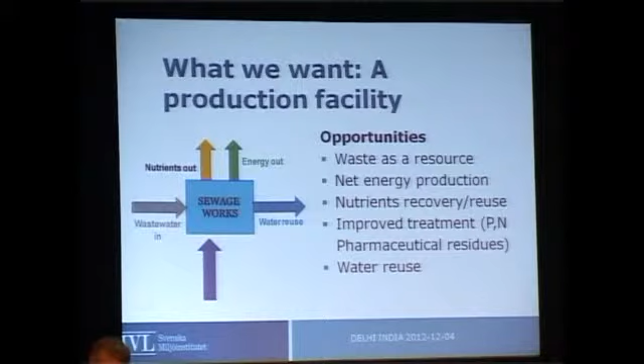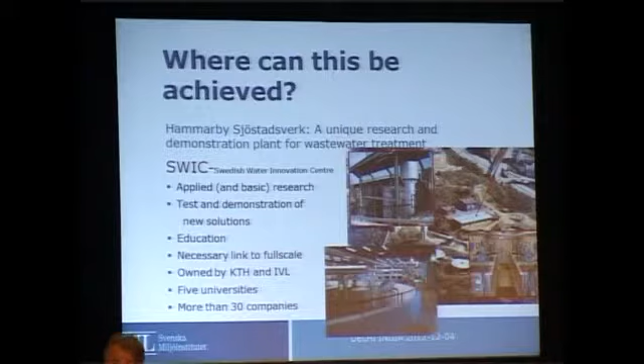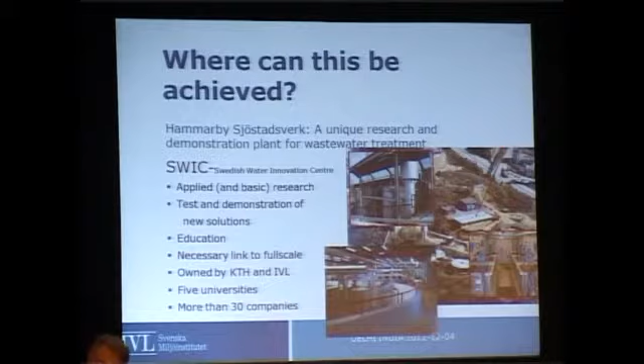We are working together in a pilot plant where we have basic research and applied research, and we include small and medium-sized companies and one big company, Xylem Solution. Together, we try to develop this solution by doing realistic research at such a scale that it can be upscaled to full scale.

We are talking also about pharmaceutical residues. The richer we are, the more medicine we consume. There is a strong link between that. Don't ask me why, but it also comes out. The residues from this medicine come out.

We have been measuring now for 5 years. It comes out from everyone because the doctors are not able to give you the correct dosage, so something will come out. You will find it in the treatment plants, out in the lakes and rivers. We can follow the concentration going up. Is this problematic? No one really knows. It might depend on if you let out more Viagra or something else.

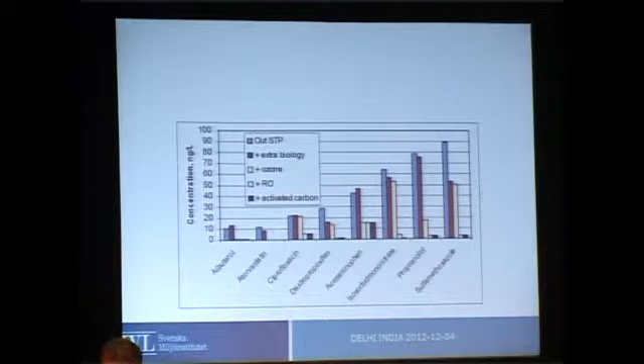But people feel more and more that maybe we should do something. So we have tried for a long time to evaluate different technologies, like here. We prolong the time in the biological treatment. We use ozone, reverse osmosis, activated carbon. With activated carbon, ozone and reverse osmosis, you can come to a very low level for most of them.

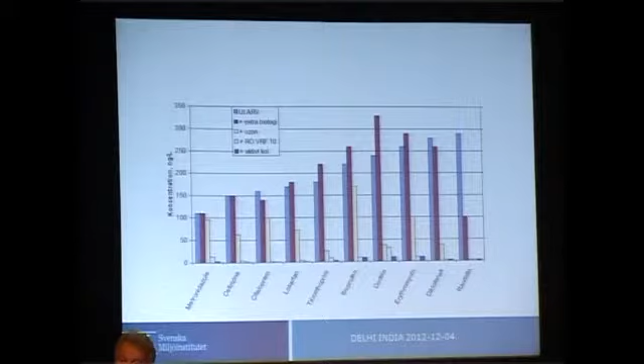We have chosen the 60 most important substances. We are now in a situation where we will run a pilot scale. We have 2 cities in Sweden willing to install this in full scale, not because it's a regulation, but because they feel they will be at the front in preparing the water much better for the citizens in those 2 towns.

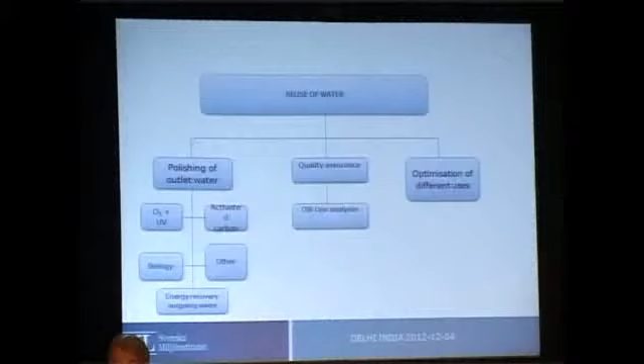But when talking about reuse of water, you must also give some quality assurance. And the development on the analytical side is not fast enough. You take your sample, go to the laboratory, and wait for hours or days, even weeks if they are busy. But you can't wait like that. You must have information directly.

That's why we work with companies like AquaQ. They gave a presentation today. They have an online measurement where you can directly see if you have microbes in the water. We must develop many more such quality assurance instruments.

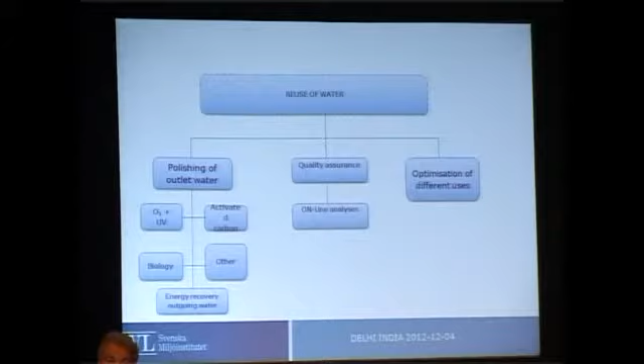Because if we recover the water for industries, they have other regulations we must follow. And we must be more clever to optimize how to use the water differently for green areas, for industries, for farmers, even for drinking purposes.

The sludge in Sweden - we started to produce biogas not because we wanted biogas, but because we wanted to minimize the amount of sludge. And then we realized, oh, we got biogas. That was funny, and then we realized it was quite good.

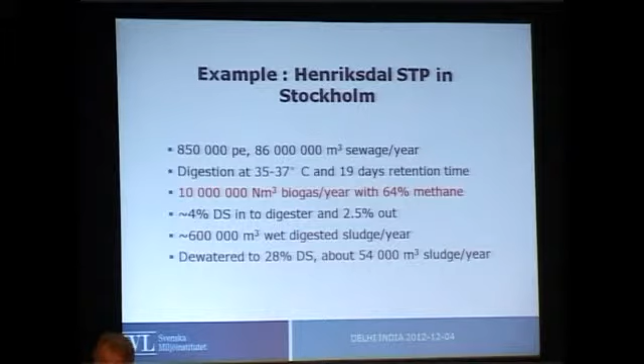So now in Stockholm, this is the biggest plant. They have 850,000 person equivalents, and they produce about 10 million normal cubic meters of biogas per year. This is now used for transportation, and I think this is a very good way to use the sludge in big cities. Now they are using it for buses, trucks and some cars.

In our work we have realized that we can increase the amount of biogas by 30% just by optimizing the anaerobic treatment plant, because it has not been optimized before. So this gives a better possibility to produce even more biogas.

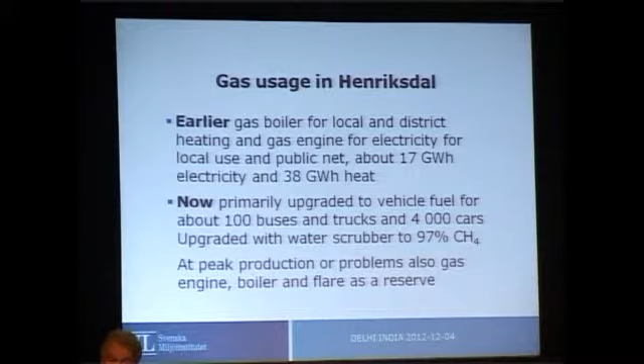In all cities, you have a huge amount of organic waste. The best way to treat it is to produce biogas and use it for transportation. You are then lowering the pressure on the city at the same time. And on top of that, we are so proud that we can still produce 2 different buses using biogas.

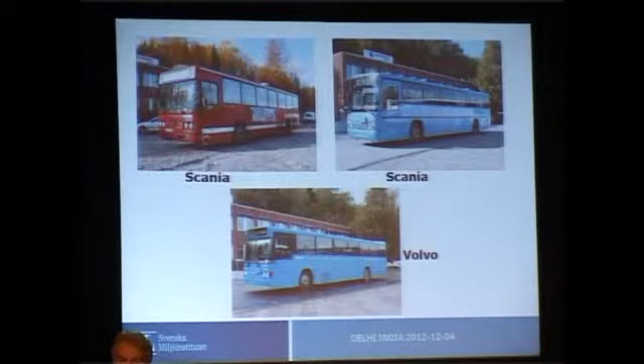You also want to use the energy from the treatment plant. In Sweden, we have connected the outlet water. We use a heat exchanger, and then connect it with the district heating and district cooling system. There you can also minimize the energy consumption a lot if you have a more open view to look into.

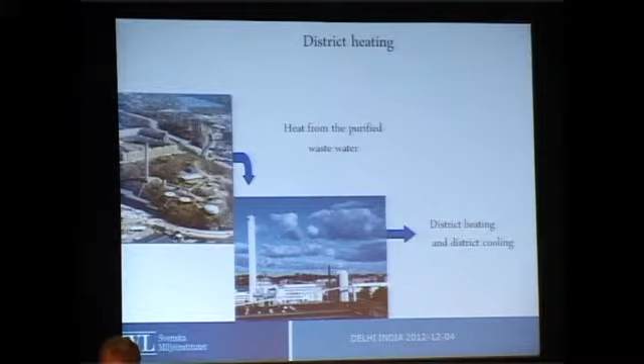If you look at the city, you treat the wastewater, and in this case you use the biogas. And then you realize you also want to get rid of the organic waste, but also, in many cases, the manure from agriculture. So what we are now doing is optimizing those different substrates to get the correct amount of biogas out of this.

And then, will the farmer use the sludge residue? 26% of the farmers in Sweden say yes. The others say no. Are they correct? No one can in principle answer that question, because we learn more and more about what is in the sludge.

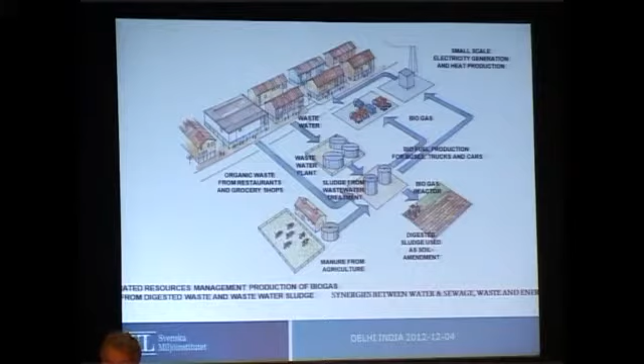So we have tried to choose an approach where we try to produce pure phosphorus. It's better, we think, in the long run to go that way, because it's always a discussion whether this sludge is good enough to use on farmland. And no one wants to destroy his own land.

This is just a couple of projects that we are running, and we do it with researchers from abroad. When we started this, all the owners of sewage wastewater treatment plants in Sweden said no, we don't pay for research on reuse of water. And that's reasonable, so they don't have to pay for that. We got money from the European Union and national funding, but to develop a solution for the world market, you must think differently.

We also try to minimize energy consumption by introducing Anammox technology, which was presented yesterday by Elzbieta from KTH.

Here, the production of pure phosphorus, we don't know if it will be successful. So we have one alternative: treat the organics and take away the metals, so that at least you can recover the sludge. But we also need better sludge dewatering technology. On top now it's like 45%. This is good, but not good enough if you want to use gasification. We believe maybe that is the next step, to produce hydrogen gas. Then you need better dewatering technology.

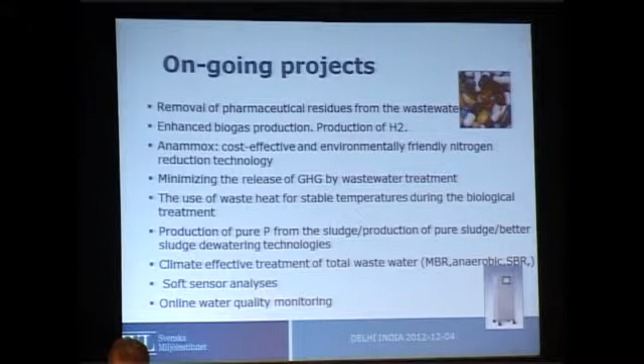We are also comparing different alternative technologies to the activated sludge process. Many of them were mentioned here during the days. And we're also developing soft sensor analysis.

When talking about the city, one trend is that you try to develop small-scale solutions. But as mentioned here, the cost will be higher per cubic meter treated. But you can also have some advantages coming closer to the houses, and you can introduce new technologies. One of them we will test is just to treat the black water on its own.

But still, for Sweden, there will be very few new houses built in the 10 years to come. So we must live with the infrastructure we have, and we try to develop that. But one other main problem in the cities is that the piping is not very good. In many cities, like 30-40% of the water that should be drinking water will not come to you - it disappears. It also happens with the wastewater. And it's a huge investment needed in the sector, so we need better solutions in the future for transporting.

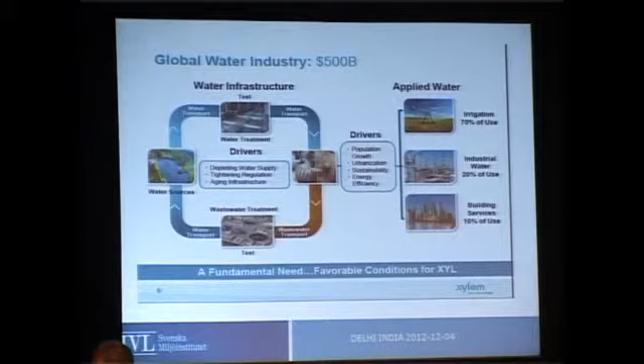Can we have it in 2 minutes? 2 minutes, thank you for that.

And that's why I want to promote EBTC. We are also partnering in EBTC. EBTC tries to bring together European knowledge and companies and connect it with India. I think that is a much smarter way than every 27 countries going on their own. So it's better to find a way to cooperate here.